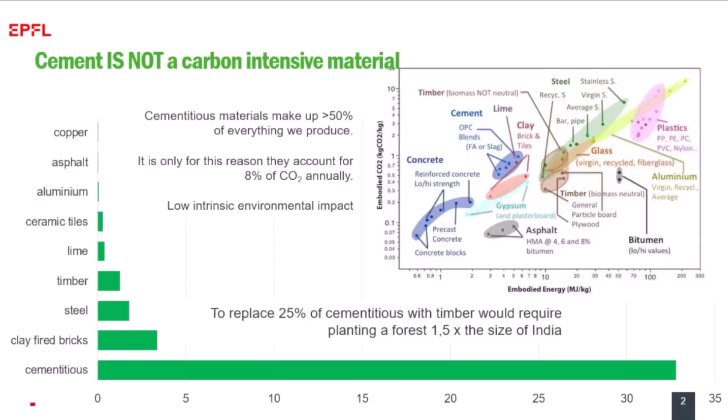So we're stuck with concrete, and it's a good product already, but we need to make it better. The second thing we always need to keep in mind is where cement and concrete are being used. And I'm sorry, it's not here in the USA. The developed countries of the global north collectively now make up only around 10% of cement use.

The big game changer in the last 30, 40 years has been the growth in China, which now makes up more than half of production. But use in China is going to go down, and that's going to be taken up by the rest of the global south: India, Southeast Asia, Latin America, and most of all Africa.

So we have to have solutions that can be used there. And here we should think about what influence we have, because the kind of codes and standards we develop in North America and in Europe are then used in many, many other countries around the world.

So we have a responsibility not just for what we can do in the US, where production of cement only accounts for something like 1.5% of the CO2 emissions, but to influence other countries like Kenya, for example, where cement and concrete already makes up something like 20% of emissions.

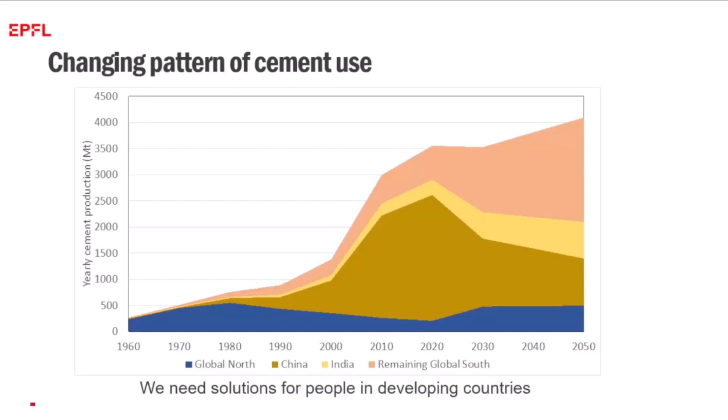Now, I explained this on Sunday. If you want to know more, there's plenty of presentations I made online which go into the detail. But the fact we use what we call Portland cement is an inevitable consequence of the chemistry and geology of the earth. So, it's no good thinking that there's some wonder new cement out there we haven't discovered.

We know that many, many technologies are limited by raw materials. I mean, electric batteries for cars are now limited by supplies of lithium and nickel. Electrolyzers everybody wants to use for green hydrogen, for example, are going to be limited by supplies of iridium. So we have to be realistic about what we can use to produce something we produce 30 billion tons of a year. And believe me, Portland cement is the best answer to that question.

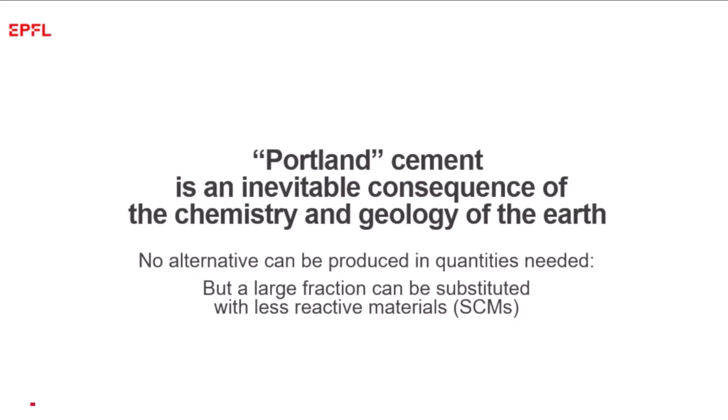Now, that doesn't mean we can't do anything. We can do a lot, and what we can really do fast is to replace a considerable fraction of the clinker by supplementary cementitious materials. And I think this is one technology which was really underestimated in the GCCA roadmap.

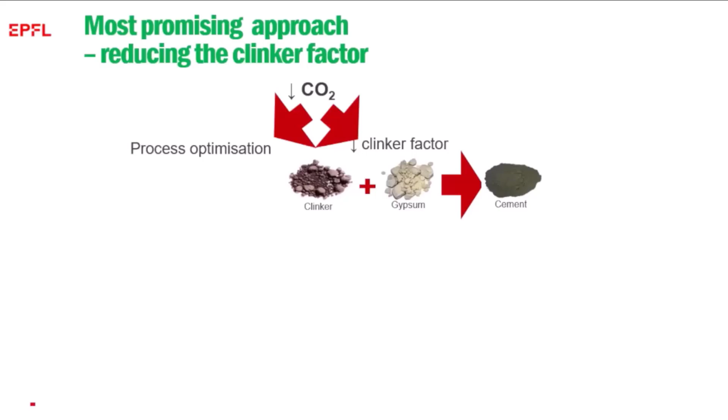So this technology is not new. It's been around for a long time. Maybe 50 years ago, cements were just clinker and gypsum ground up together to produce cement. But in most parts of the world, we've been using SCMs for a long time. We've been using limestone, which just comes from the cement quarry, which finally is making inroads here in the US. We've been using fly ash, which has been added at the concrete level. But the problem with fly ash, it comes from burning coal.

That's the number one thing we have to do to confront climate change, because burning coal accounts for something like 60% of CO2 emissions.

And that's where we can move fast, by going away from coal. Already one of the biggest factors in the reduction of CO2 in the US has been switching from coal to gas. Just doing that, still using fossil fuels, you can have huge reductions.

Slag is coming from producing steel, and again, that's a very energy-intensive process, something like 10 times more energy-intensive than producing concrete.

And even today, the amount of blast furnace slag we have available is just about 8% compared to the production of cement. And so even now, 95% of blast furnace slag is already used in cement and concrete.

If you specify high slag levels in your project, you're just taking it away from another project. And globally, in terms of the world, which is what matters, you have no net reduction in CO2.

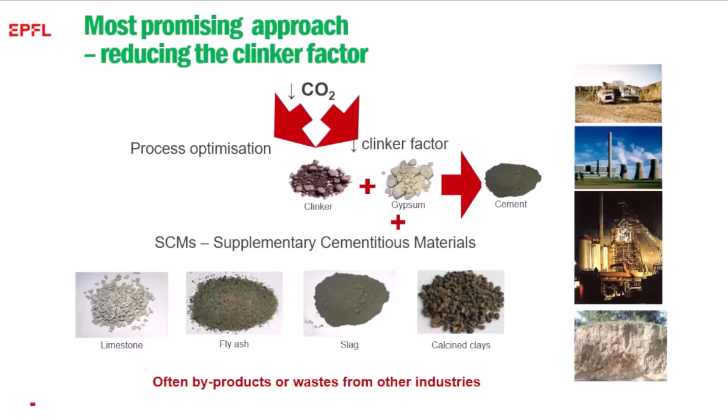And then what we've got, which can really extend this technology, are clays, which is what I'm going to talk about. So this just shows what I already said.

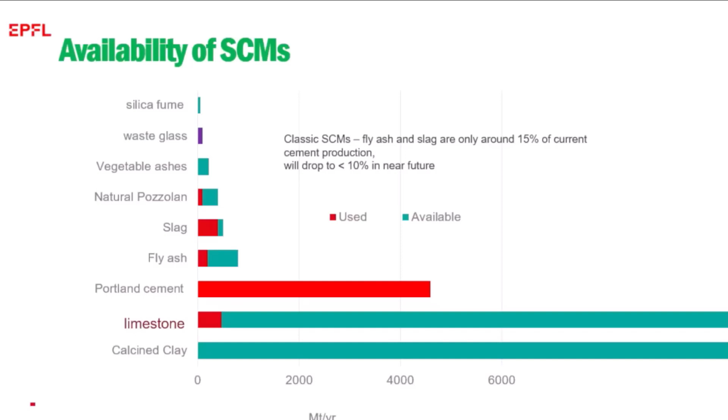Slag, very limited supplies, already all used. Fly ash already quite limited and going to go down, but a very variable product, so it's quite difficult to use all of it. Limestone we have a lot of, but when we go above levels of about 15%, we simply have a dilution, which doesn't really help anything.

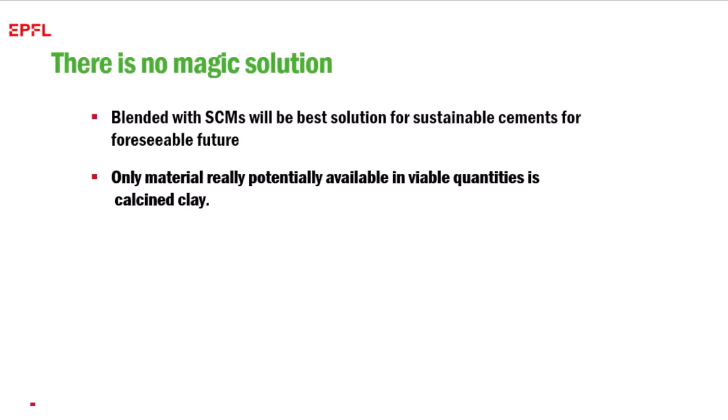And then we've got clays that can be calcined. Now, we have to go further than that, because what is really interesting is this synergetic reaction between calcined clay and limestone. And this is the basis of the technology we call LC3, which stands for limestone calcined clay cement.

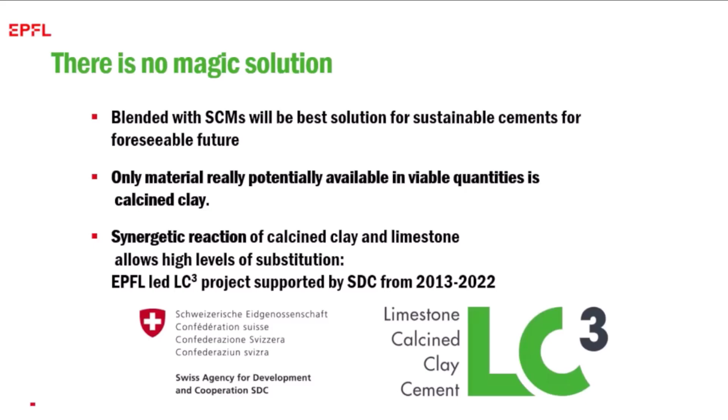With this project, we've been supported the last 9 years by the Swiss government. Now we're supported by other organizations, notably Climate Works, who are here in the room, and we'd like to thank them for their funding. Now, the essence of this is that rather than just having only a pozzolanic substitution.

Such as we might substitute 20 or 30% material with the pozzolan, by exploiting this synergy between the calcined clay and the limestone, we can replace another 15% of the energy-intensive clinker with limestone, which has virtually zero CO2 emissions.

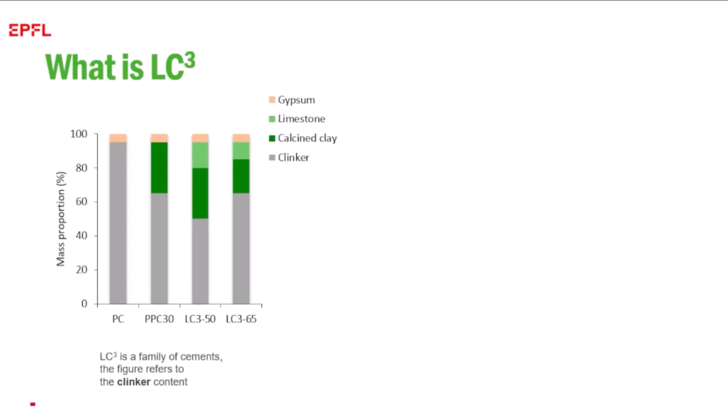And you have a whole family of this. What we usually talk about is LC350, where the amount of clinker is just 50%, but you can have higher amounts of clinker. You can also have much lower amounts of clinker.

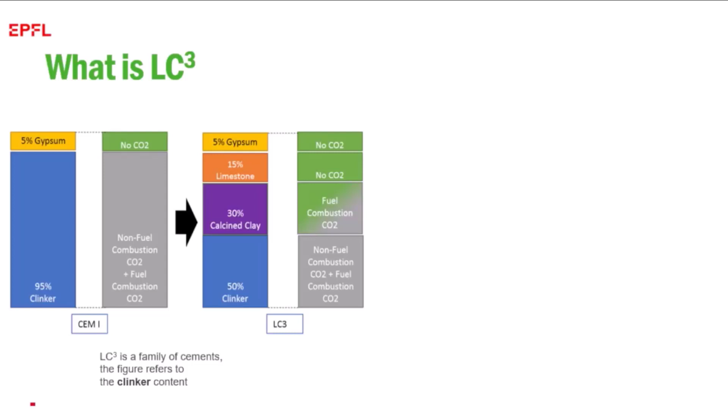This just explains why we reduce CO2, because we replace the clinker by a combination of calcined clay and limestone. Limestone, virtually no CO2, and calcined clay, very low CO2, a little bit of CO2 from the fuel to calcine it, but this is about 10 times less than clinker, and eventually we can see this process being electrified.

And the really interesting thing is with this combination, in as little as 7 days, we can reach the same strength as the reference Portland cement. So you've got the same strength really quite quickly.

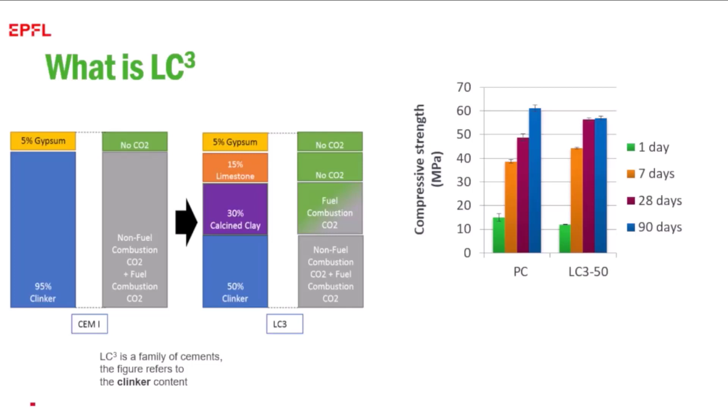So in essence, we're talking about something with 50% less clinker, 40% less CO2, because we have a little bit of energy for the calcination, and we have a similar strength, and we have a very good performance in terms of durability, in terms of resistance to chloride penetration and alkali silica reaction, which are two of the major causes of poor concrete durability.

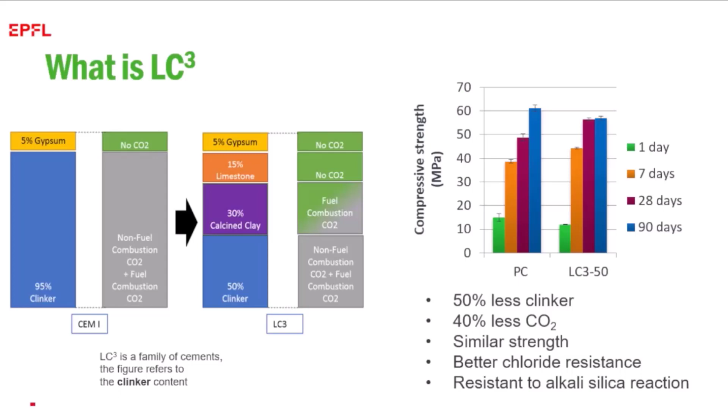So why can we get such high levels of substitution? It's because we use clays which contain some kaolin, and kaolin has this crystal structure like this. We have a layer of silicon atoms and a layer of alumina atoms. When this is calcined in the range 700 to 850, this structure gets disrupted.

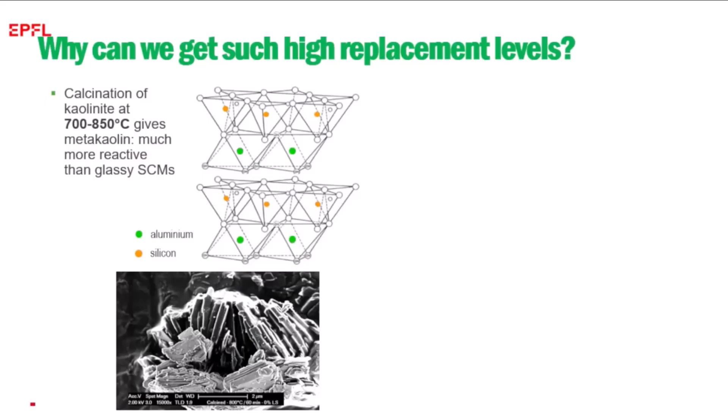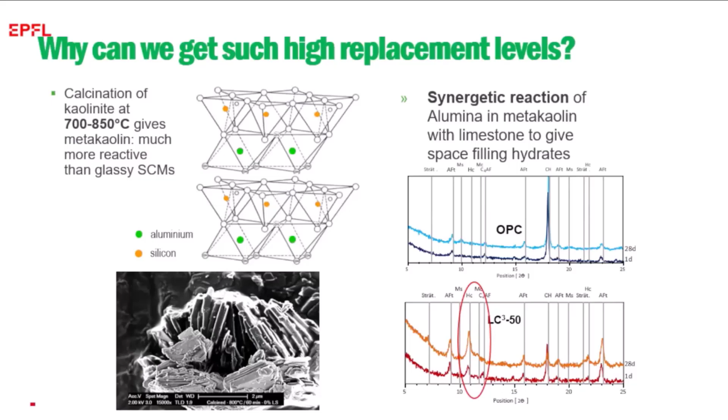And the silica is available to react in the conventional pozzolanic reaction, but then the alumina can react with the limestone to give these products called carboaluminates. These are already there in Portland limestone cement, so they're not something new, they're something we understand, and these contribute very well to strength and durability.

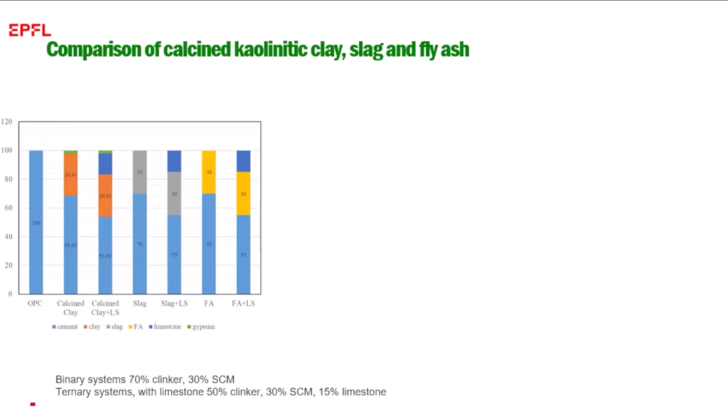And if we look at the strength development here, we see that in the very long term, all these blends do very well. But the big advantage of calcined clay is that we develop the strength much earlier.

Particularly, we have pretty comparable results between the binary blend with just 30% replacement and the ternary blend with 50% replacement. These stay ahead of the reference at 7 days, whereas the limestone addition tends to have much more impact on the mixtures with slag and fly ash because the alumina in those materials is not so readily available.

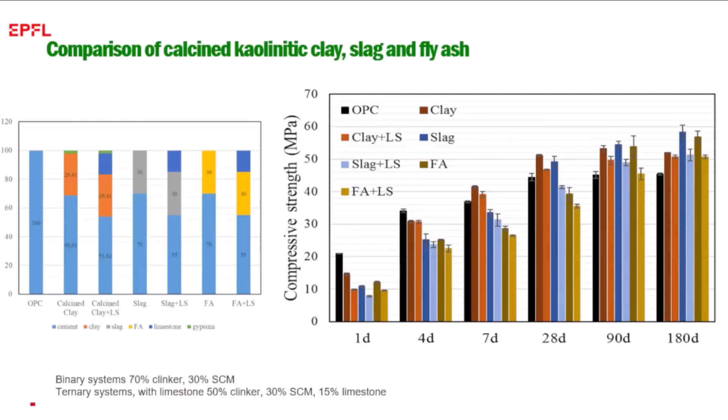They're much more slow reacting materials. And of course, one of the main limitations is the strength development at early age.

If you're producing these materials in a cement plant, you can optimize the particle size distribution of the clinker component, and you can get even the same strength at 1 day. And this doesn't negatively impact rheology.

You have some impact of the calcined clay, which can be dealt with using superplasticizers, but the grinding of the clinker doesn't make it any more difficult.

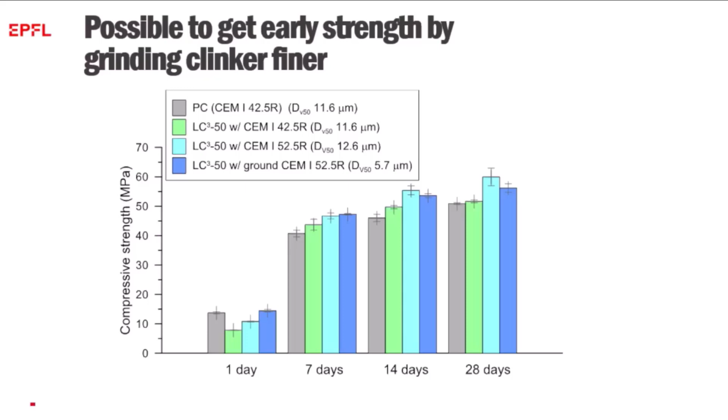And this is a nice comparison based on cements in Chile, which have used natural pozzolans, uncalcined pozzolans since the 1960s. They have 2 cements on the market, one with 20% replacement, one with 35% replacement.

And now if you go from a natural uncalcined pozzolan to calcined clay, you can match that performance at much, much lower clinker contents. You can match the performance of the high-strength blend, 80% clinker, with only 35% clinker, and the general use one with only 25% clinker.

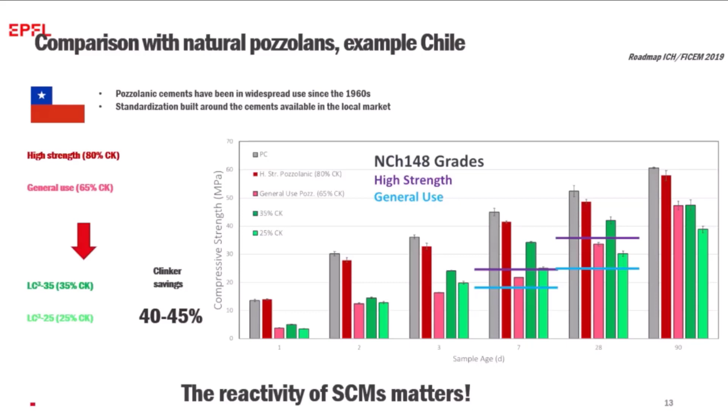So this gives us an incredible potential to go to much lower CO2 contents, which we can't do with other SCMs. Now, as I've said before, we need some of this kaolinite, but the distribution of these kaolinitic clays is very widespread in the world.

Everywhere you have this kind of orangey yellow color, you will have kaolinitic clays. And what's really exciting is we see that these materials are really available in those parts of the world where the use of cement is going to increase most.

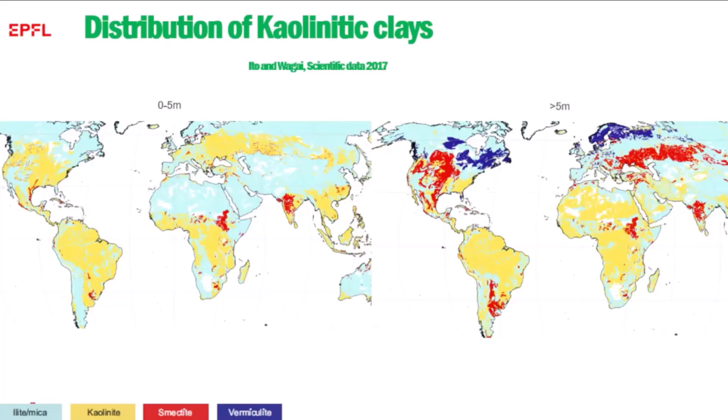And in these parts of the world, I mean Africa, for example, apart from South Africa, there's no fly ash, there's virtually no slag. So they don't have SCMs there at the minute. Further than that, they don't actually have much limestone, so often they've got to import clinker, and being able to produce calcined clay locally can dramatically reduce their need for imports and therefore reduce the price of cement.

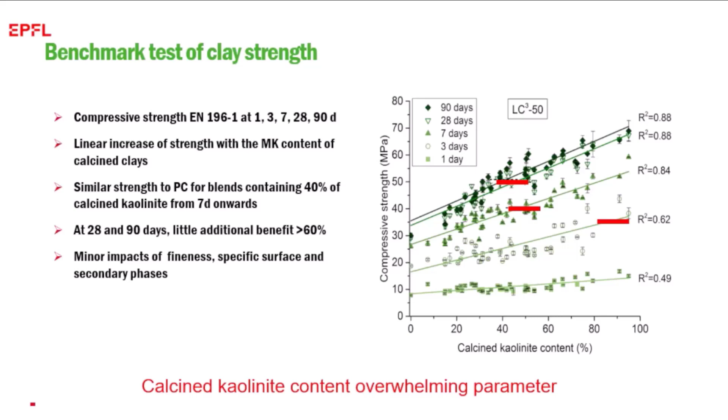But even some of these clays in the range down to 30 are doing pretty well. So we can calcine it very simply with existing technologies. We can even do production in an existing clinker kiln.

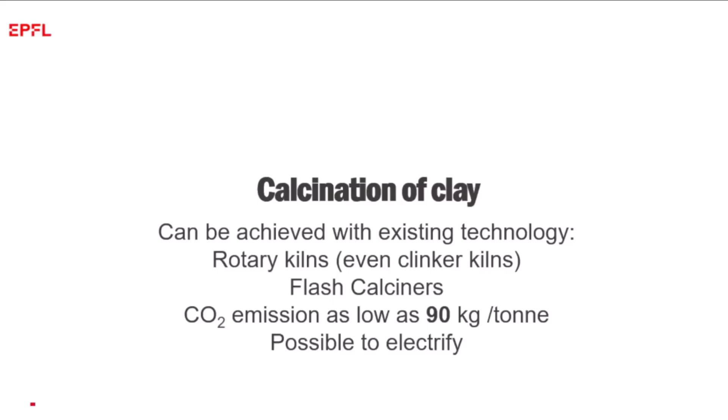We did a trial where just 6 hours after stopping producing clinker, exactly the same kiln could produce calcined clay. Now, obviously, you don't want to switch production around, so if you want to produce calcined clay on a regular basis, it helps to have a specific kiln, but this can be a rotary kiln or a flash calciner.

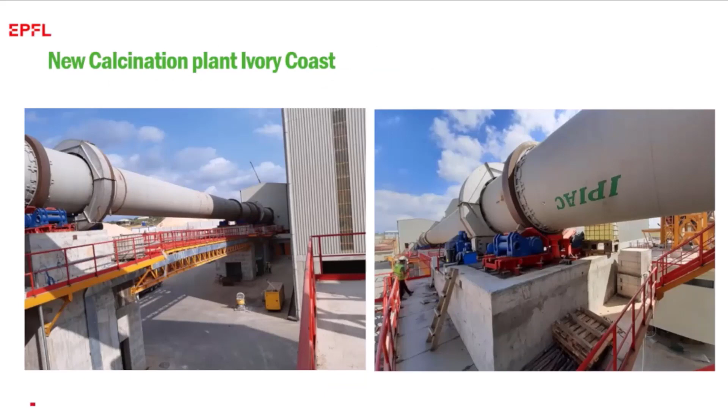And we've taken this through to full-scale building structures. This is a plant which was recently commissioned in the Ivory Coast, and what was particularly interesting in this plant was we could show that you can change the color of the clay.

So many people said, well, people don't want to buy red cement. You can say, why not? It might even be a good marketing strategy. But if you don't want red cement, you don't have to have red cement. This doesn't at all affect the reactivity of the clay because it's just to do with the iron oxide impurities in the clay.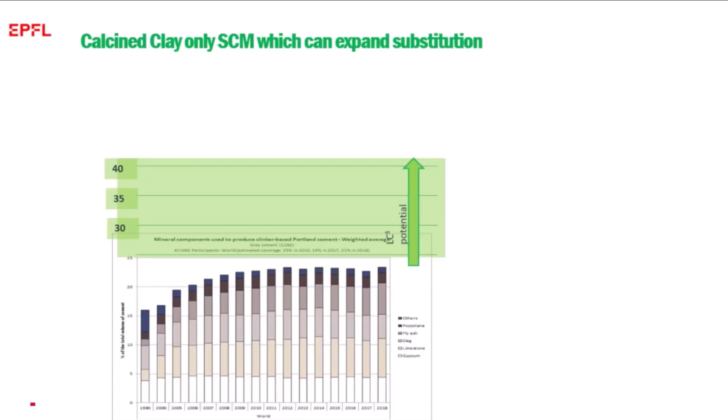Now, if we remove this limitation by bringing calcined clays into the mix, we can easily go to a level of substitution of 40%. Nobody's really argued with me that on average we could go to that level of substitution, and that would represent a saving of 400 million tons of CO2 per year.

To put that in context, that's 10 times the emissions of Switzerland, where I'm from. It's something like between 1% and 2% of the entire world's emissions. But certainly on a horizon of 2050, I think we could do a lot better than that. You saw already we had good performance down to clinker contents of 25 and 35%. So we could probably do twice as well as that.

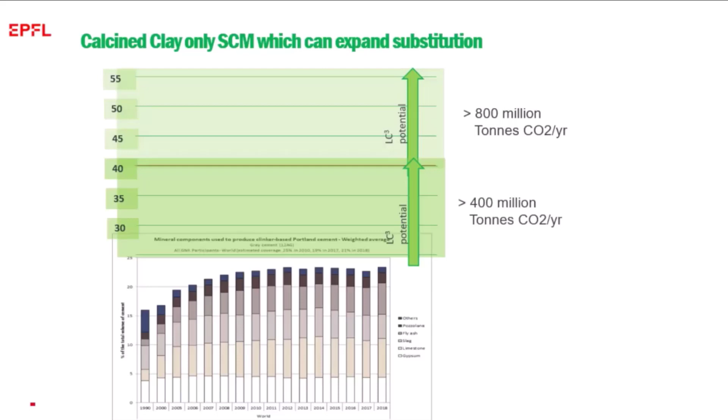And that's a really significant contribution to world CO2 emissions. And what's even more interesting, we can actually do it at cheaper cost. So we're always hearing about green premium, that these new products cost more to make than the existing ones.

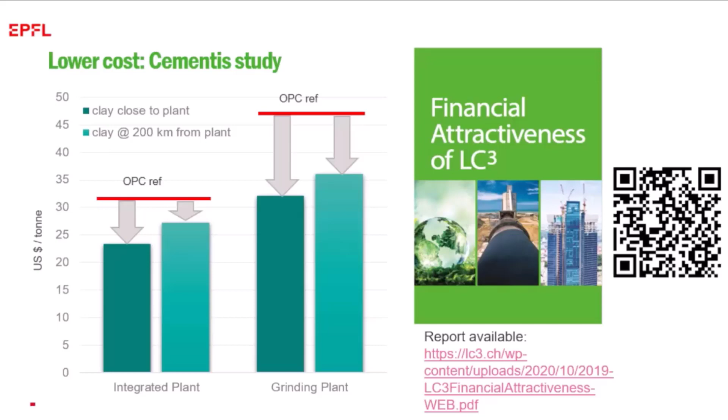But this study, we evaluated it very closely, and even up to 200 kilometers from a plant, even if you have to bring your clay that far, in an integrated plant where you're also producing clinker, you can have reductions of like 10, even 20%. In a grinding plant, which is the situation in most of Africa where you have to import clinker, you can have much bigger savings. And this study was done a couple of years ago before the energy crisis. As energy prices go up, these differences will increase.

And fortunately, we're now working with people in all these countries. In India, we already have the announcement that calcined clay will be used in this new building, in this new campus.

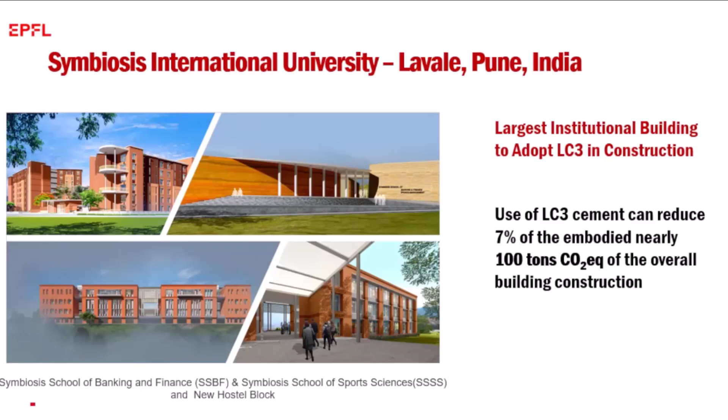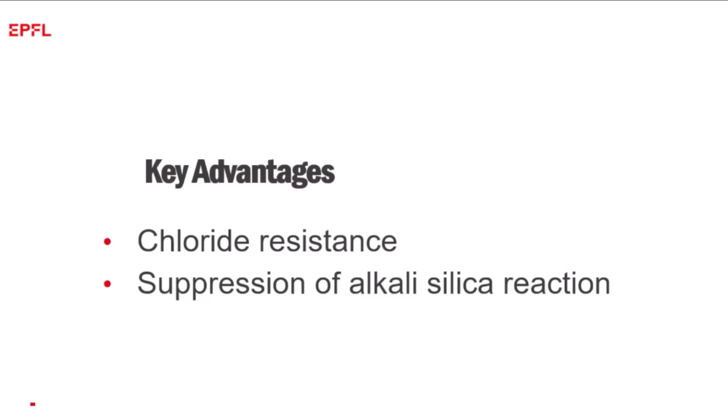Now, for the second part, I'd like to go a little bit more into the science to really explain why this is such a good material from a durability standpoint, as well as from a low CO2 standpoint. The two outstanding advantages are resistance to chloride penetration and suppression of alkali-silica reaction.

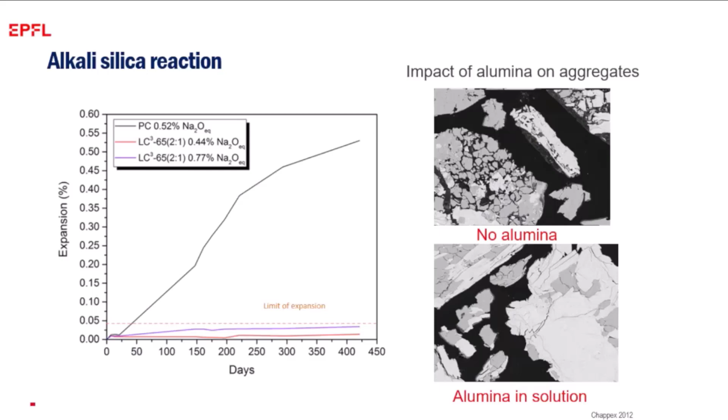So suppression of alkali-silica reaction, basically we have a pretty much flat line now. This was our results after 1.5 years in alkali solution. We now have results out to about 6 or 7 years, and we still see no expansion. We know from a previous study we did earlier in 2012 that the presence of even very low concentrations of alumina in solution really suppresses the dissolution of the aggregates. So you're suppressing the reaction at source by the presence of alumina, stopping the silica dissolving.

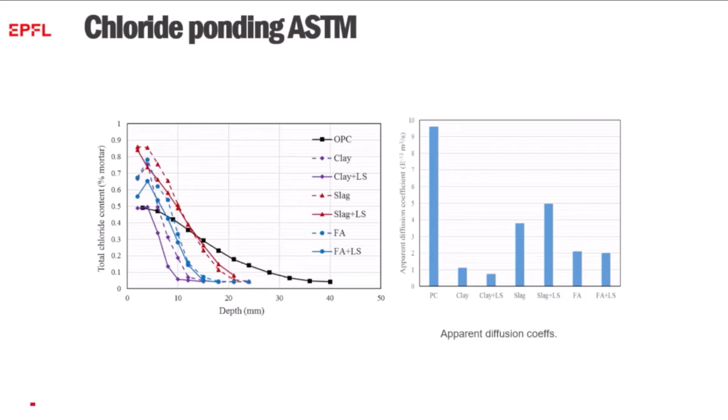Chloride resistance is also outstanding. These are the blends I showed you earlier, the binary and ternary blends based on clay, slag, or fly ash. Here is the reference Portland cement, showing very deep chloride penetration. Here are the slag blends, they're better, the fly ash better again, but the best of all are the calcined clay blends, and the best one is the combination of calcined clay plus limestone. The apparent diffusion coefficients of the calcined clay plus limestone are 10 times lower than the reference.

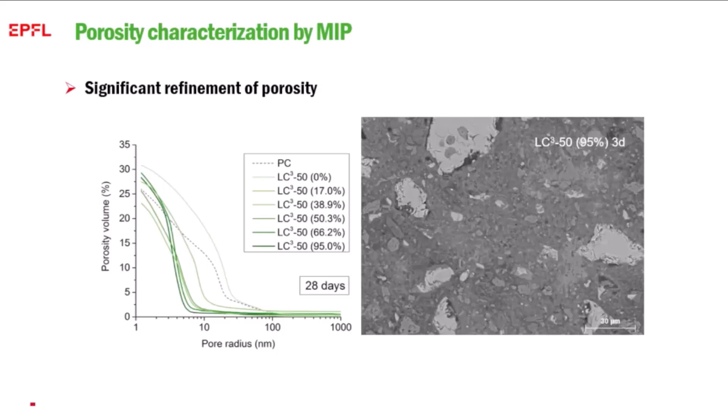Now, when we first started working on this, we thought it was all to do with pore structure refinement. We can see the mercury intrusion porosimetry curves for the calcined clay mixtures have much finer pore sizes than those for Portland cement. And even by transmission electron microscopy, we can see this very dense structure given by the CSH.

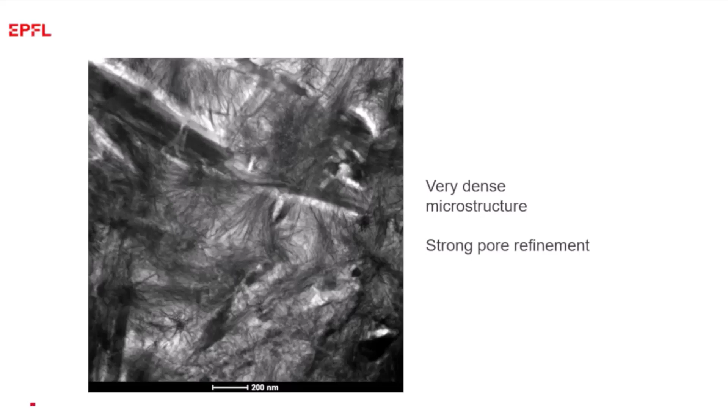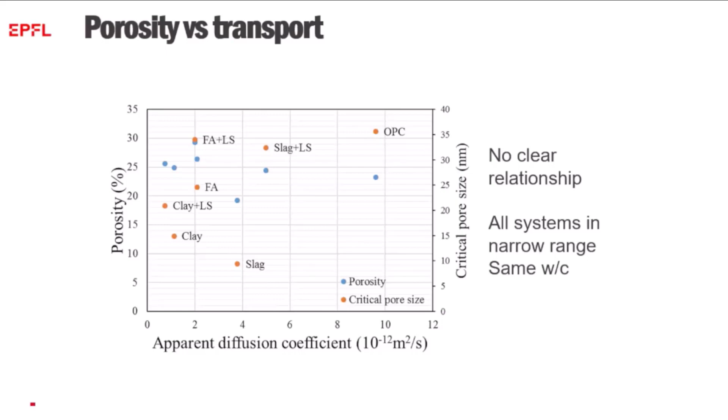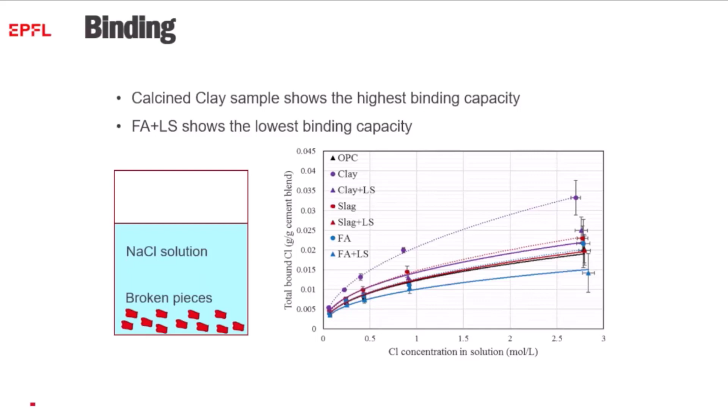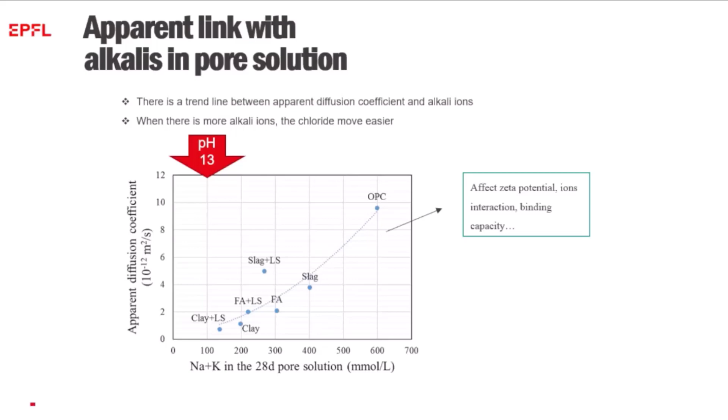Well, what's missing, and what's probably missing, is the concentration of the pore solution. We can see there's a very nice correlation between apparent diffusion coefficient and the sodium potassium in the pore solution. And I would like to point out that even though we lower the sodium potassium in the pore solution, we're still well above pH 13, so no problem for protection of reinforcement.

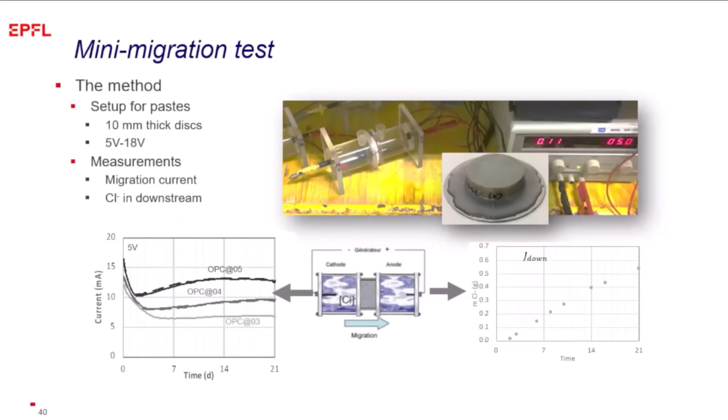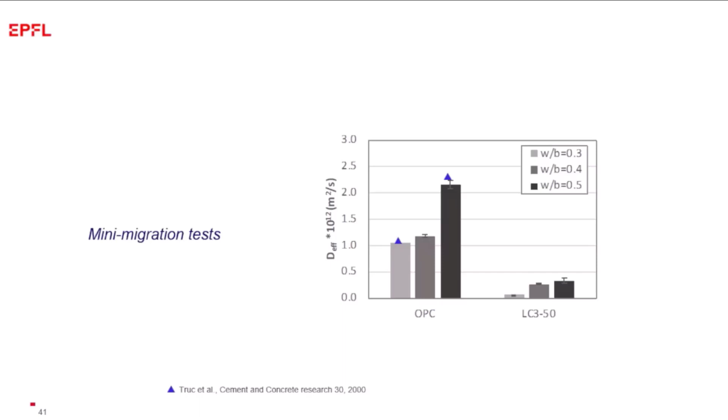And then when we studied a wider range where we looked at the impact of water-cement ratio, and we studied it in this new mini migration test, looking at the flow of chloride through these paste samples, what's really interesting is we see that all the calcined clay blends, so even the calcined clay at a water-cement ratio of 0.5, is better than the Portland cement even at a water-cement ratio of 0.3. So of course we know water-cement ratio is important, but we've got impact in the calcined clay way beyond that.

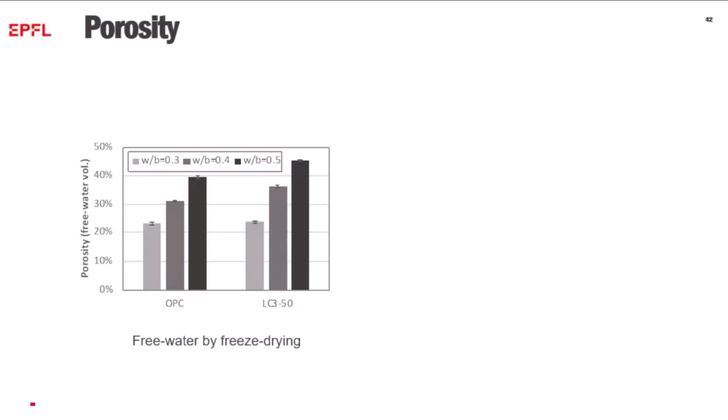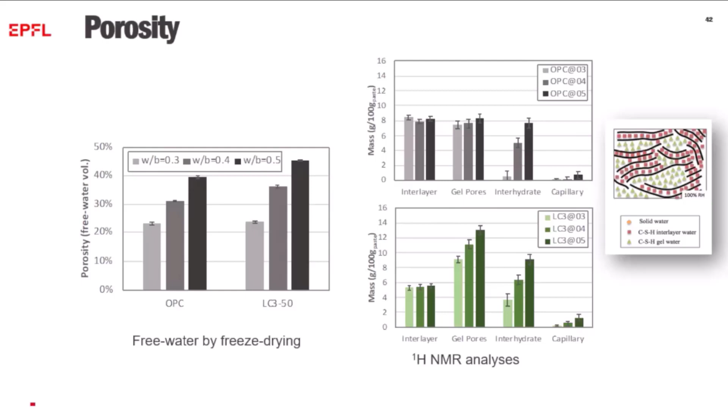And we looked and we said, well, is this related to the porosity? We calculated the porosity by the free water by freeze drying. We see no particular difference. If anything, the LC3 has higher porosity. We then did a detailed study by proton NMR. Again, we see if anything, the calcined clay has got higher porosity. So why does it have lower chloride diffusion?

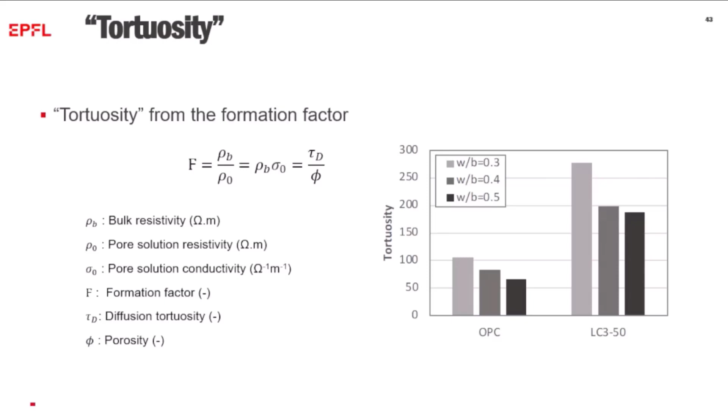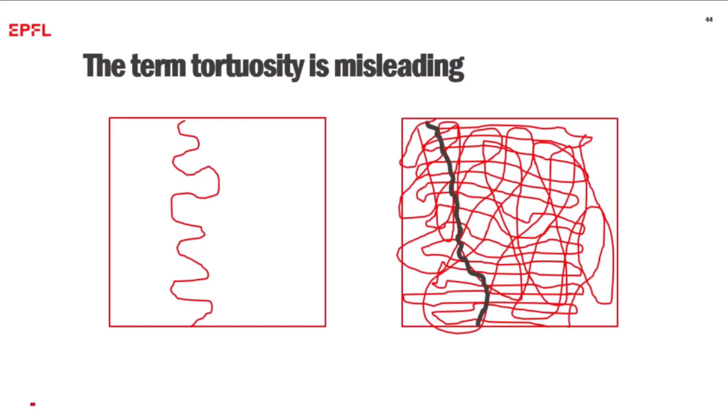And then we calculated this thing people call tortuosity. And I'm going to tell you, we have this idea tortuosity is pore complexity, but it's really not the whole answer. And we see these very nice high tortuosities, but as I want to stress, the term tortuosity is misleading. We think of it as being, well, the ion has to go through this complex pore path, and to get these very high tortuosities in the range of 100, you'd have to have an incredibly tortuous pore path, but you really can't produce that in a statistically isotropic material because you have another tortuous path like that, and you can always find a shortcut through here.

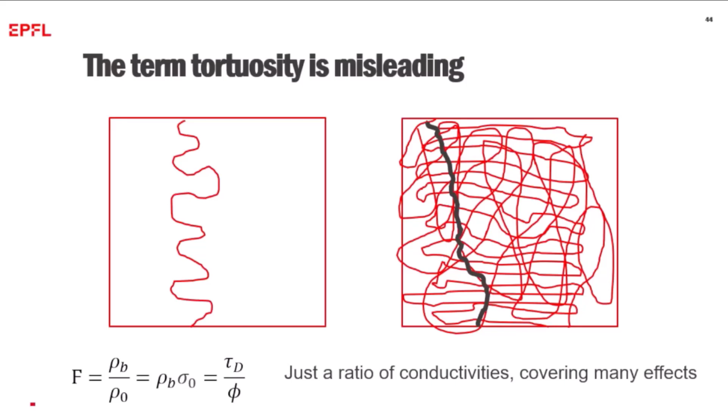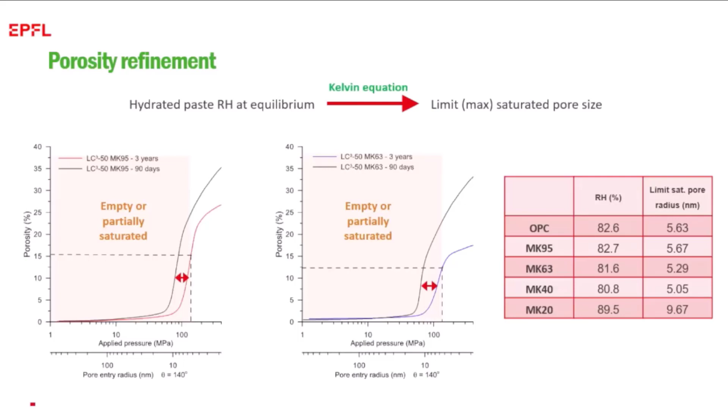So the problem is that the way we define that, it's really just a ratio of conductivities, which is covering many different effects. And we've looked at this in more detail. What's particularly important is the fact that in practical materials, we've got relative humidities which go down quite significantly. So we're not at 100% relative humidity, and this means most of the pores are empty. You can see here in these long-term experiments that after 3 years, the radius of pores that can still contain water is only 5 nanometers. And in those 5 nanometer pores, you have a very complex interaction of the ions with the CSH surface.

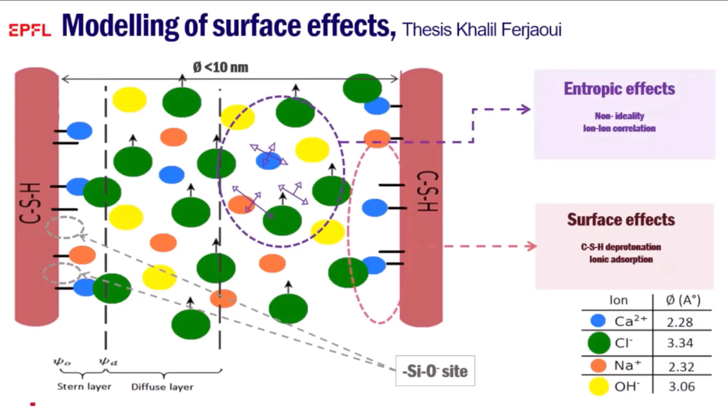We've tried to model this in this recent thesis, and basically we see that there are several factors interacting. So we've got the pore size effect, we've got the fact that the CSH surface changes, and we've got the fact that the pH of the pore solution changes. And so we've got 2 times 2 times 2. I know that equals 8, but our model isn't perfect yet, so that's roughly equal to the 10 times reduction we see in practice.

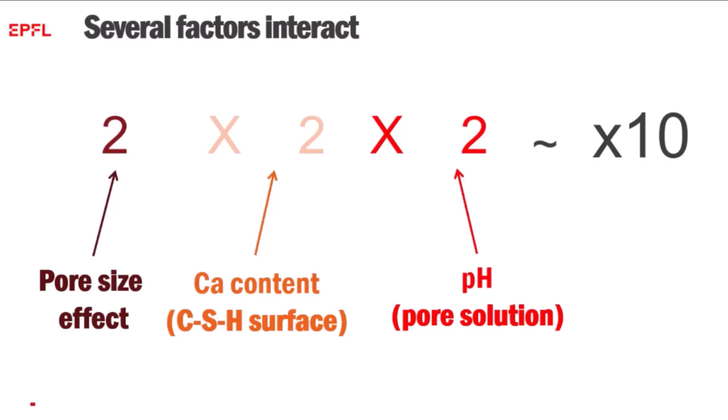So all of this is really to demonstrate that we really have a very sound understanding to be sure that we have good durability of these blended cements with calcined clay. And after all, the kind of products we're forming are exactly the same products that we have in existing cements we've already been using for the last few decades.

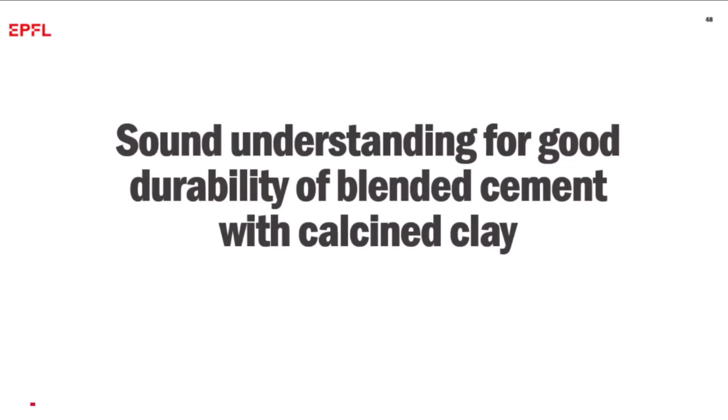Now, just to finish, I want to stress that this isn't the end of the story. Calcined clay gives you a huge potential for CO2 reduction, but you should never see it in isolation because we have to work through all these steps of the value chain.

Reducing CO2 from clinker production has already been largely achieved. The quick wins have been implemented. We can still go somewhat further by having efficient plants, using alternative fuels and raw materials.

In the clinker and the cement, we can go further by increasing the amounts of SCMs, which is really only possible by using calcined clays, because slag and fly ash are already used up.

But we then have to take it further by making sure that we produce concrete efficiently. That's usually as simple as using good aggregate gradings and good admixtures. These are things that have been around for a long time, but they're often forgotten. And we see concretes out there that have 2 or 3 times the amount of cement they need to have. 2 or 3 times the amount of cement means 2 or 3 times the amount of CO2.

And then we've still got to work on reducing concrete in a building. The problem is that concrete costs much less than an engineer's time. So it's usually more expensive to say, well, how do I optimize my building to make sure I'm not over-designing? And we have a kind of...

overdeveloped safety reflex. We have codes which already have very good safety factors, but then people say, well, maybe I'll just add another 10 or 20% just to be on the ultra safe side. We now have to think that adding 10 or 20% is adding 10 or 20% more CO2, and we have to stop using it.

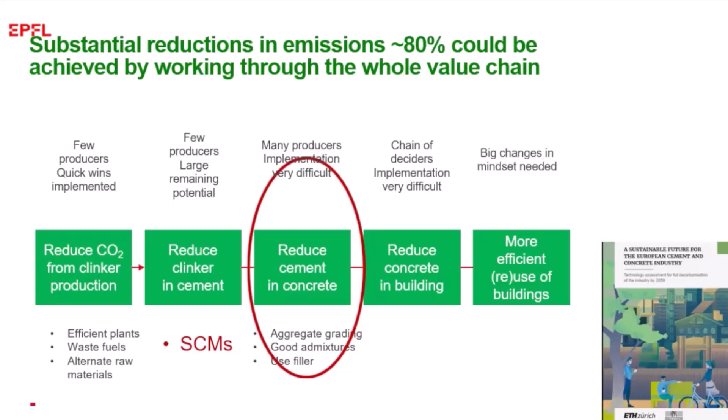So we have to bring all these steps together, and if we do that, our estimates are we can achieve 80% reduction of CO2 from cement and concrete.

And basically it comes down to this. We've got all these steps: efficiency in design, efficiency in concrete, savings in cement and binder, which can be achieved at very low cost. And then at the end of the day, you've got something left over, which has to be dealt with by carbon capture and storage.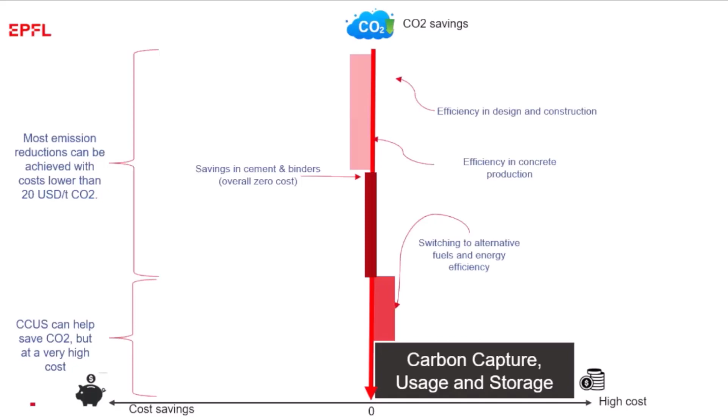And that's without talking about the extreme difficulties of implementing these carbon capture and storage technologies in developing countries.

So coming to the conclusion, I hope I've convinced you that we can do a lot about concrete. It's not just about calcined clay, that's one possibility, but we have to make sure that's part of an integrated package, working on concrete and working on structures.

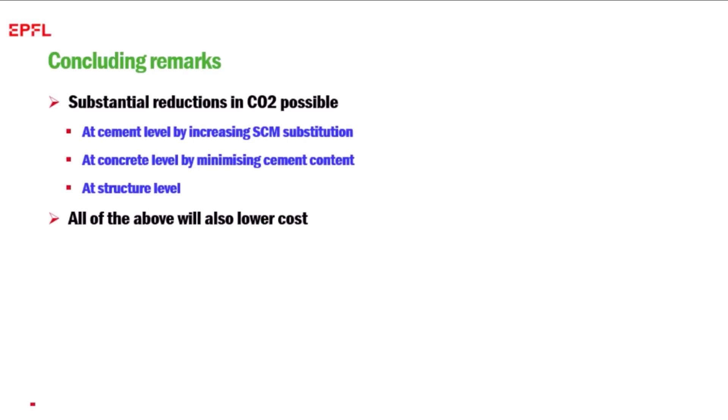And we have to get the different parts of the industry working together. All of these can lead to lower costs. We're going to have some carbon capture and storage, but this will be high cost and the infrastructure is not yet in place.

And when we come back to the SCMs, we won't have more fly ash and slag on a worldwide basis. You can say, okay, we can dig fly ash out of the ground, that's fine, but that's going to be a short-term solution, and we need to think long-term here.

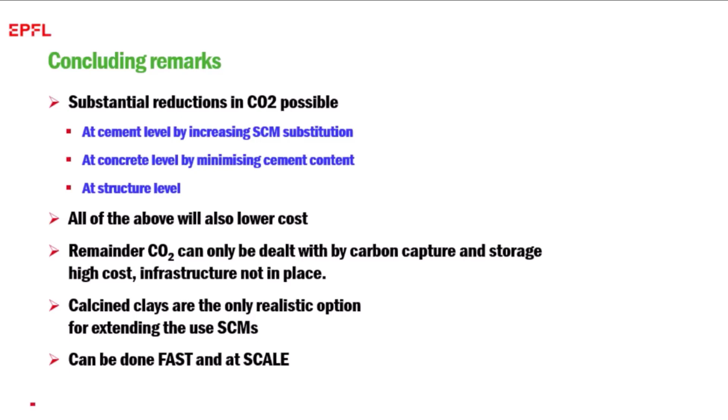And putting calcined clays into practice, the big advantage is we're not limited by raw materials. All the technology is existing. We already have something like 10 plants around the world producing this stuff. So there's really no reason we can't roll it out at large scale and very fast to meet our objectives by 2030. And with that, I'd like to thank you for your attention.